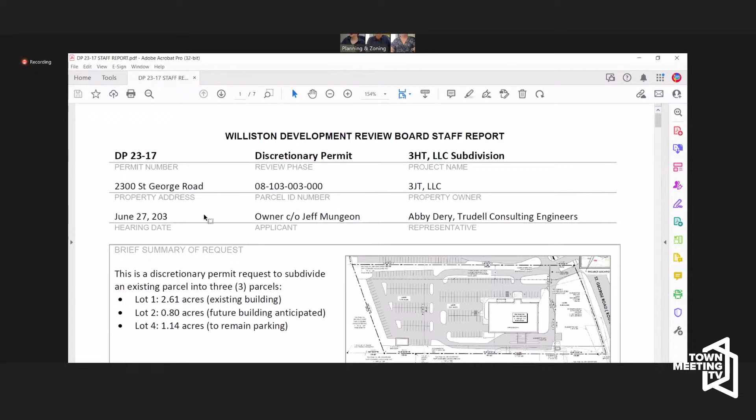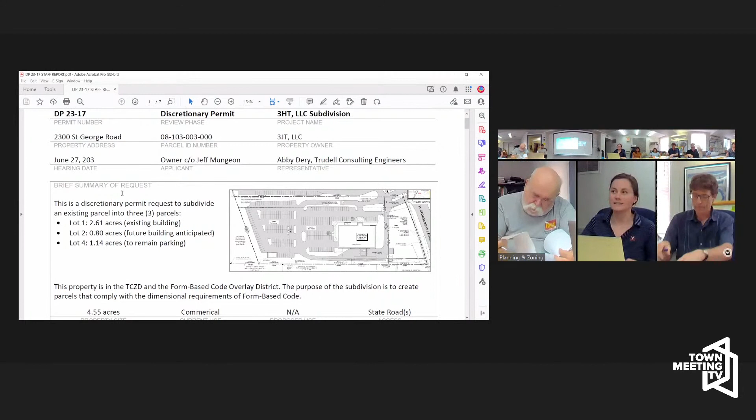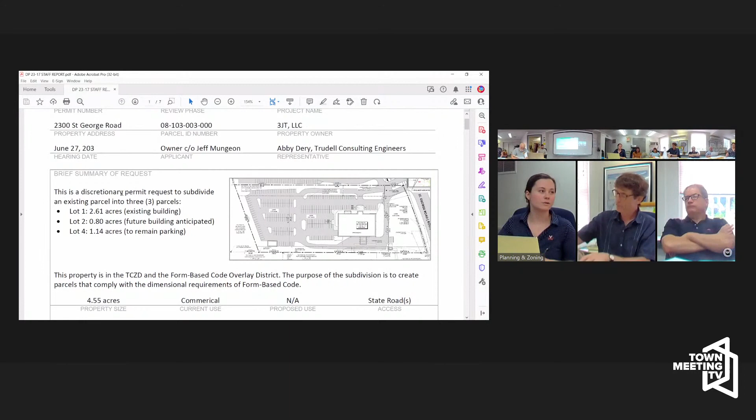So this is a request for a discretionary permit to subdivide an existing parcel into 3 parcels. Lot 1 would be 2.61 acres and would contain the existing building present on the site. Lot 2 would be about 0.8 acres; it fronts along Route 2A, where we anticipate a building in the near future. Lot 3, mislabeled here as lot 4, actually lot 3, would be 1.14 acres. It would be towards the rear end of the parcel and remain parking for now.

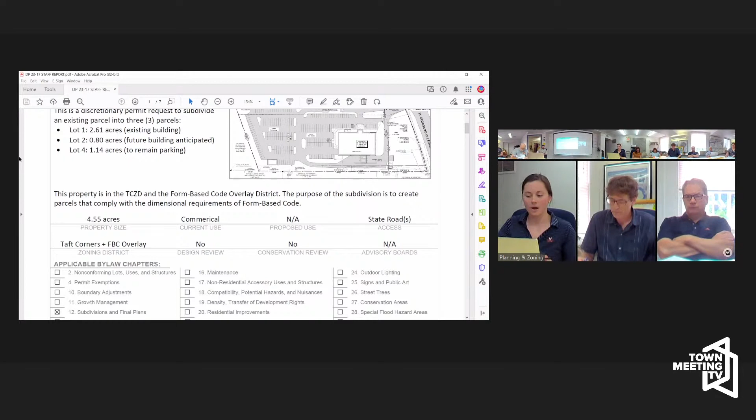This property is in the Taft Corners zoning district, but more importantly, the form-based code overlay district. The purpose of this subdivision is to create parcels that comply with the dimensional requirements of form-based code. Currently the property has a commercial use on it, an existing office building with a bank and a bank drive-through. No new uses are being proposed at this time; it's merely the subdivision. And the property has access on a state highway.

It was not subject to design or conservation commission review. Tonight, staff is recommending that you take testimony and close the hearing, deliberate, and make an approval. We're recommending approval with the addition of condition number 12.

Project history: this is the first time the DRB is reviewing this subdivision. You may recall in October of 2020, a pre-application review for a 7,600 square foot 2-story building that would be located along Route 2A. That project never moved forward through permitting. However, this subdivision is in anticipation of a building in that similar area in the future.

Public Works comments are included; they're mainly about needing clarifying information about utilities and stormwater billing. The fire department did not have comments. Interdepartmental comments as they pertain to site development would be handled through the certificate of conformity process. No comment letters were received at the time of mail out, July 20th, nor were any comment letters received to date.

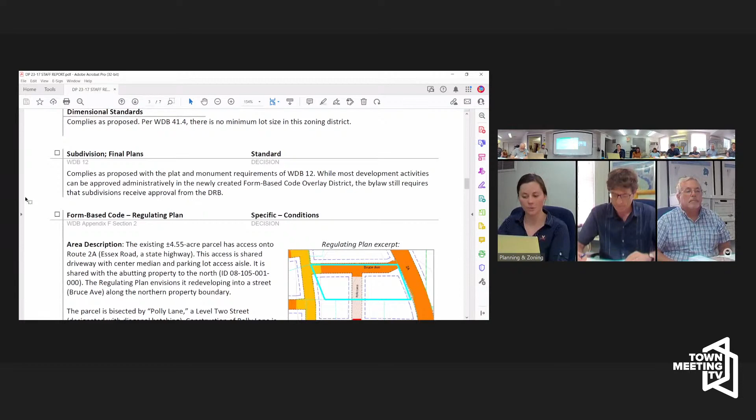I do note that a certificate of conformity application is anticipated for lot 2, but it has not been filed; that's the administrative design and permitting process for buildings and site development under form-based code. The underlying Taft Corners zoning district does not have a minimum lot size for this district, so compliance is anticipated there. The proposed subdivision complies with the subdivision platting requirements and final plan requirements. And then one condition is added to ensure compliance with the form-based code.

What's shown on the screen is an excerpt of the regulating plan map. This roughly 4.5 acre parcel has access onto Route 2A, and they share a driveway with the abutting property to the north. The regulating plan envisions that shared access driveway to be redeveloped into a street.

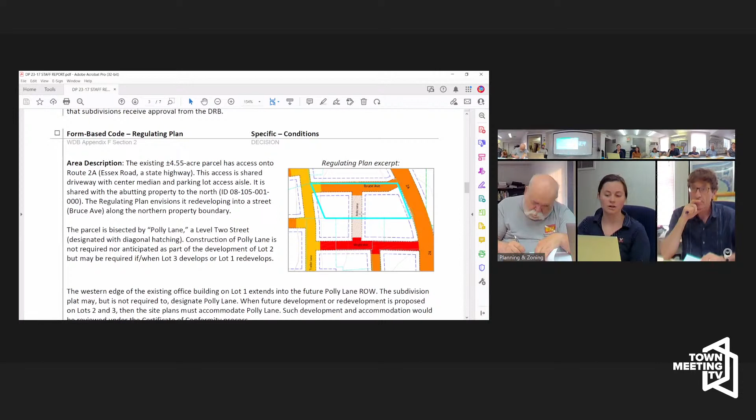Shown on the regulating plan is Bruce Ave. This parcel is bisected north-south by Polly Lane, shown in hatching as a Level Two street. So we're not anticipating or requiring the construction of Polly Lane as part of this subdivision or as part of the future development of lot 2.

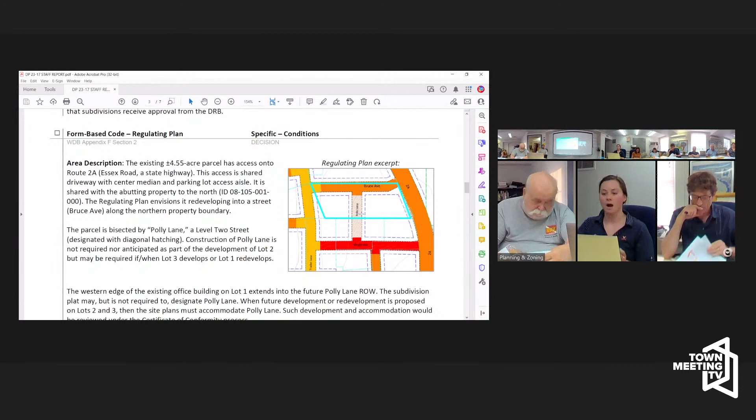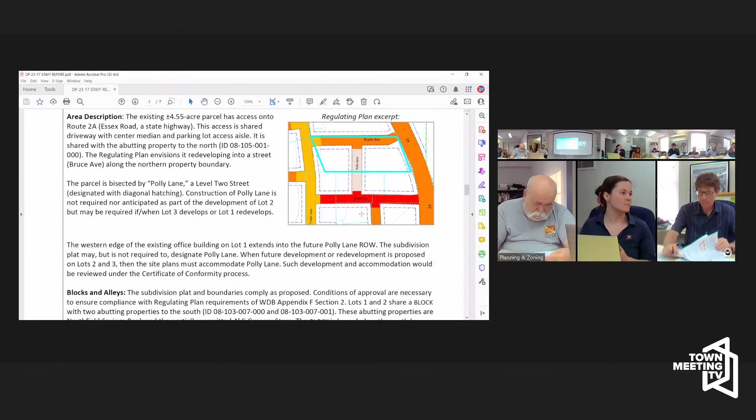It may be required if and when lot 3 or lot 1 come in for redevelopment. The subdivision being proposed doesn't preclude the development of Polly Lane. The western edge of the existing office building on lot 1 does partially extend into the Polly Lane right of way, and that's why it's shown as that Level Two street, because it conflicts with an existing structure.

Blocks and alleyways — the subdivision plat and boundaries comply as proposed. We are adding a condition related to an alleyway. Form-based code says streets must be interconnected, and there must be alleyways in the middle of blocks. This property shares a block with two abutting properties to the south, where a bank is currently, and that partially permitted Aldi grocery store was reviewed.

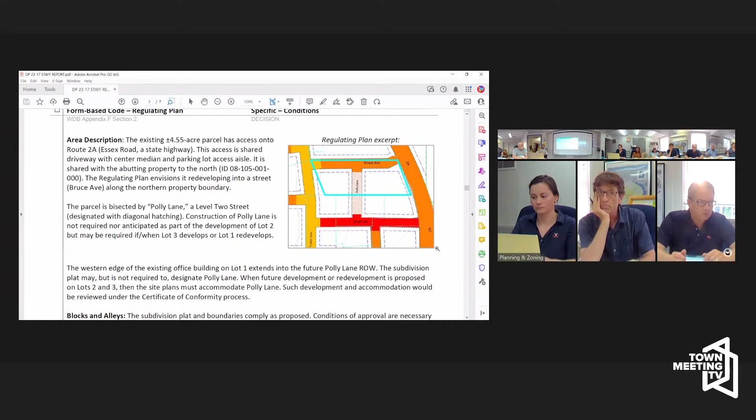So, if I could ask a quick question — if you go back to Polly Lane, that was part of the original mapping you did in advance of form-based code? Yes, it was added to the map or adopted as part of the form-based code. So why would the right of way of Polly Lane extend into the existing building if you knew the building was there? Why wouldn't you have moved it to the side so it didn't conflict with it?

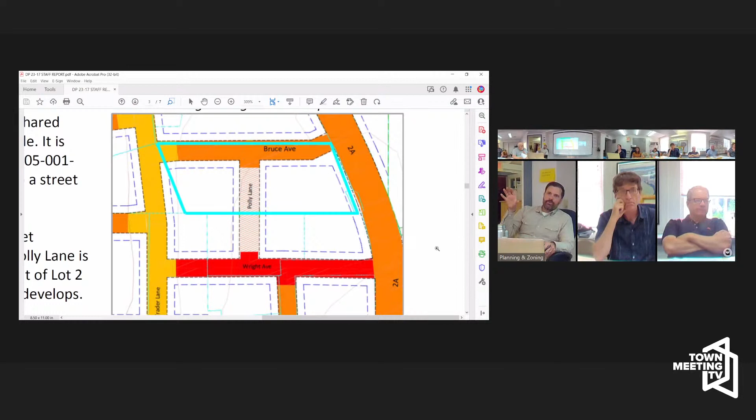So in a few places in Taft Corners, we had blocks that were overly long based on the principles. And the office building block is overly long. So this block without something dividing it is long. If you put that street, Polly Lane, completely outside the building or move it reasonably away, you create an overly long block and a short block. So the solution we came up with was that sometimes we would put streets on the regulating plan that intersected with an existing building, and we didn't want to give those the same force in the review process as streets that were over an existing driveway or just over undeveloped land.

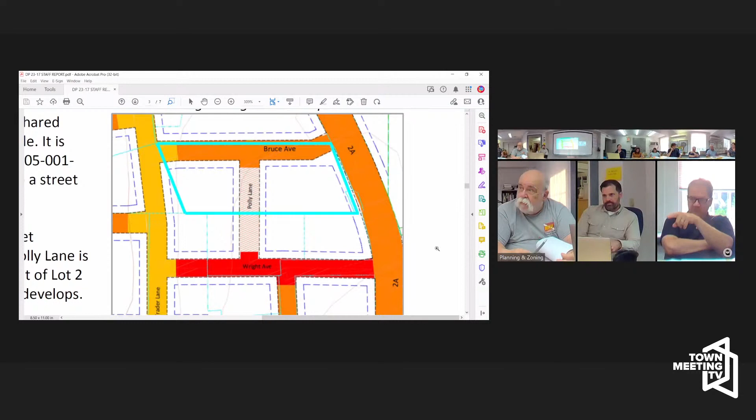So that hatching, the designation as a level 2 street, says this is a street that's required if the building in the way of it is demolished and redeveloped, essentially. So, taking that one step further — they're required to build it? No, no, they're not required to build it. They would only be required to build it if they were redeveloping the lot with that building on it.

If the lot in the rear with the parking — assuming they tore the building down — they wouldn't be required to tear the building down. But if they did tear it down, they could not rebuild up to the same point it was at. They would need to accommodate Polly Lane.

Another example of this, if anybody's familiar with where Ashley Furniture is in Ware Park — there's a level 2 street that runs straight through the Ashley Furniture building to come out and connect to Route 2. That would only be required if that entire site was redeveloped and the building demolished. Another example runs down the backside of the Taft Corner Shopping Center, right behind the Hilton stormwater pond. Only if that entire site was redeveloped would that street be required as part of the development pattern there. So there are just places where, to come up with the block pattern, we needed to draw a street, but it was in conflict with existing development.

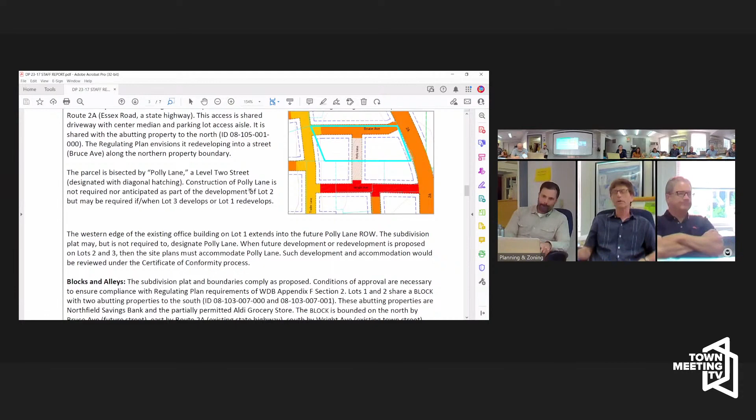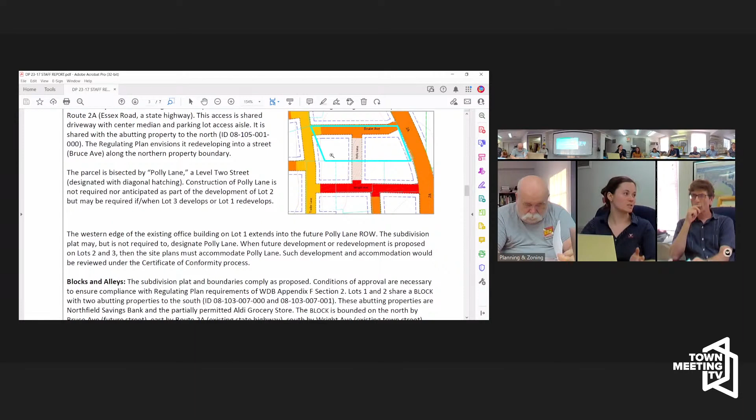So the subject parcel, highlighted in blue, shares this overall block with two abutting parcels to the south. This overall block is bounded by Route 2A on the east, Wright Avenue on the south, future Trader Lane along the west, and Bruce Avenue along the north. In order for this to comply with form-based code, there needs to be an internal alleyway that runs either north-south or east-west along this property boundary. Then if the neighboring properties ever come in to develop, they would build their portion and connect into the alleyway system. That's what condition number 12 is saying — that the plat needs to show the alleyway on the plan.

I'm sorry, and where would that alleyway be? So the way I have condition number 12 worded — and I'll jump back to the map — it designates an alleyway, or at minimum half an alleyway, along the property line between proposed lots 1 and 2 and the abutting properties to the south. So it would be along here.

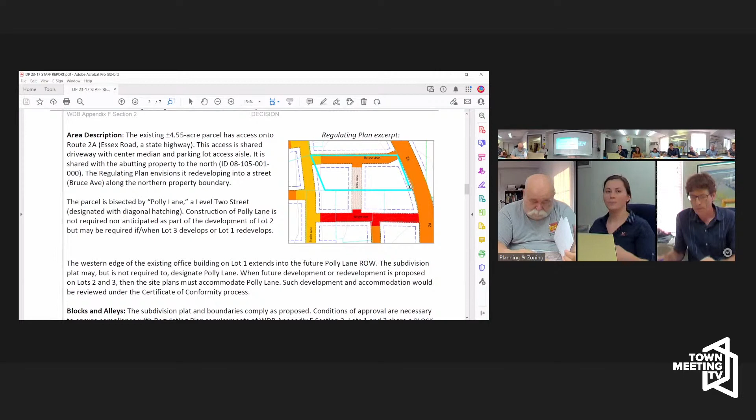It would come out and have frontage along Route 2A. However, we're not requiring them to connect through to Route 2A. When that building is developed, we know the state is gonna say no, you can't have something coming out on the state highway. So that alley would probably dead end before it gets to the right of way of the state.

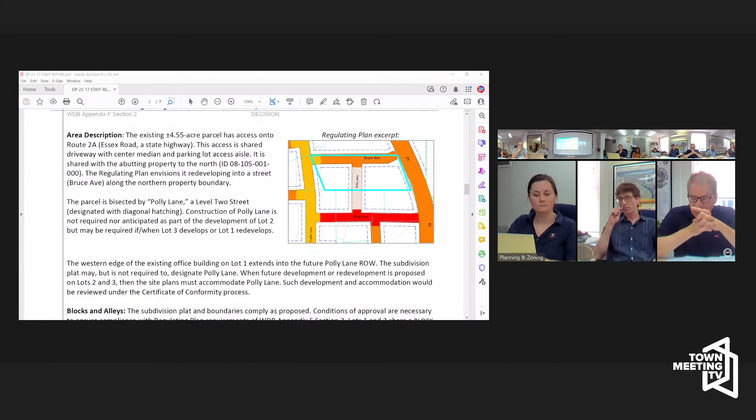But won't this affect the new building they're talking about putting on lot 2? Or are you gonna have an alley going right through the middle of that? It's going right through the existing office building too, right? And so you're expecting to have an application in at some point for a building that's gonna front Route 2A, right?

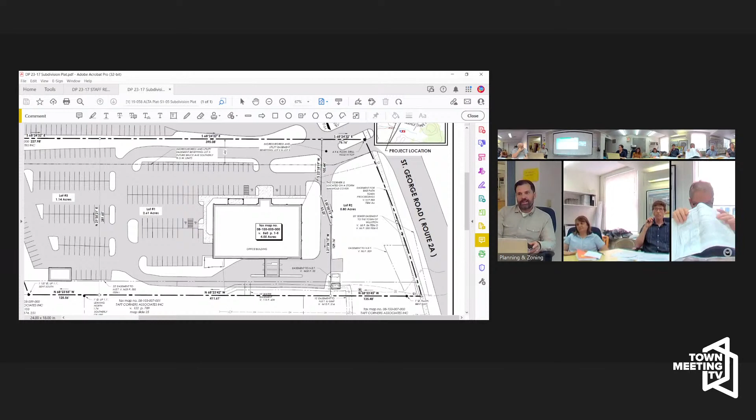And if you go back to that, you're showing an alley right through the middle of that parcel, and the line is the parcel. Is that right? So we're down here, are you down there? We're between this lot and Northfield Savings Bank to the south. So I guess I'm looking at it through where that little building is.

So the idea is this subdivision would designate basically half an alley along its property line, such that as redevelopment proceeds, an alley could eventually be created. That comes out at T, so it would be the southern line of the blue line. Right, bottom of the blue line, yep. All right, got it.

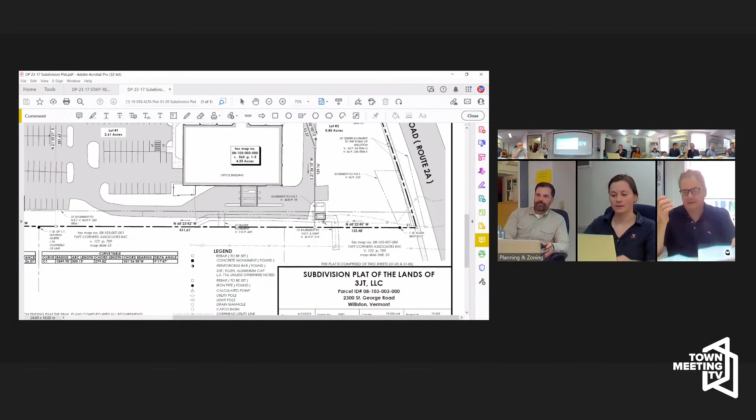Yeah, so that blue line is this line, and on the plat it shows a 25-foot easement to NET, so that dashed line, the alley would run somewhere along in there. Got it, okay.

Welcome to the form-based code.

The thing about it is there are a lot of these infrastructure pieces that happen in small steps. First, plan for it, accommodate it, more redevelopment happens, eventually it becomes necessary to build it, to either provide access or make properties work together. So we're at those very early stages where you're gonna see plats that identify things that don't really do anything for the development or get built out. They just get identified in anticipation of future redevelopment and shared access between properties.

So if the adjacent property doesn't redevelop for 20 years, that line just sort of sits there on paper until that time. And we also know that in the case where an alley is designated that comes out to a state highway, we're not going to see a connection unless the town, in the distant future, takes over jurisdiction over that state highway. We've been told that essentially flatly by VTrans. So we accept that. We have functional access from the existing drive that would begin to be built as a street. We're fine that way, but we're planning ahead.

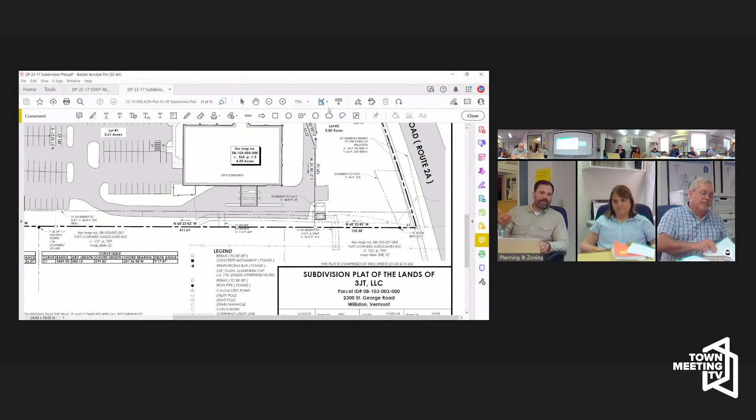So for the development this subdivision might create, there's plenty of parking within the code. Functionally, every time something new is proposed out there, we'd have to go back and look at shared parking and how it's being managed. We have commercial, residential, shared, and reserved parking requirements for this district that all interact with one another, and we'd look at it each time something's proposed.

That the bank's good for now? Yeah. So in other words, lot 2 is literally going to have all shared parking with somebody else, since there's not a lot of spaces on 0.8 acres, which has a building on it.

The code strongly encourages folks to park underneath buildings, so you'll likely see some structured parking with a lot of new proposals out there. For any residential use, there's some minimum reserved parking, meaning there needs to be parking reserved for the residential use, and then some can spill over into shared if there's a mixed use building with commercial.

And it's okay if it's on an adjacent lot, I guess, since we're looking at a subdivision. There's nothing about subdividing a parking lot that says you can't share across lot lines. You absolutely can.

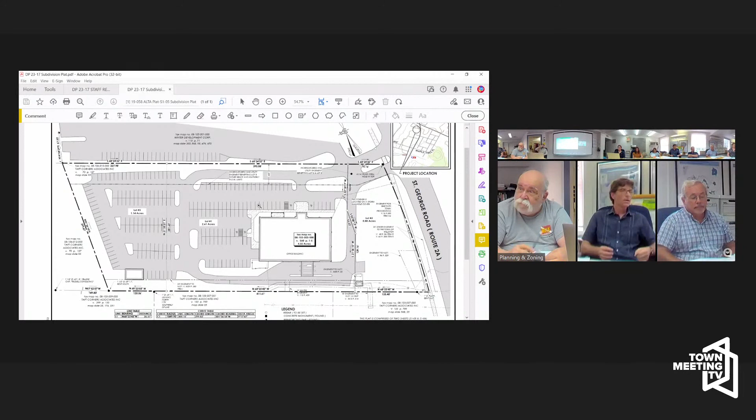That was it. So I guess open it up to anybody in the audience who has a question. 100% of them shaking their head no. If you're on Zoom and you'd like to comment, you can let us know in the chat or press the raise hand button. Our online attendee has done neither. One last chance, anybody here to comment? If not, then I am going to close this hearing at 7:31.

Thank you. I'm going to ask board members whether you feel there's a need to go into deliberative session. If any one person does, we will. I don't think so. No, we'll let it go.

So if that's the case, I would ask if anybody has a motion. You're on video, you know that. I know, okay. Right there. I'll remote. Thank you, Scott.

As authorized by WDB 6.6.3, I, Scott Riley, move that the Williston Development Review Board, having reviewed the application submitted and all accompanying materials, including the recommendations of the town staff and the advisory board required to comment on this application by the Williston Development Bylaw, and having heard and considered the testimony presented at the public hearing of July 25, 2023, accept the findings of fact and conclusions of law for DP 23-17, and approve this discretionary permit subject to the conditions of approval above. This approval authorizes the applicant to file final plans, obtain approval of these plans from staff, and then seek an administrative permit for the proposed development, which must proceed in strict conformance with the plans on which this approval is based. Thank you. Do I have a second?